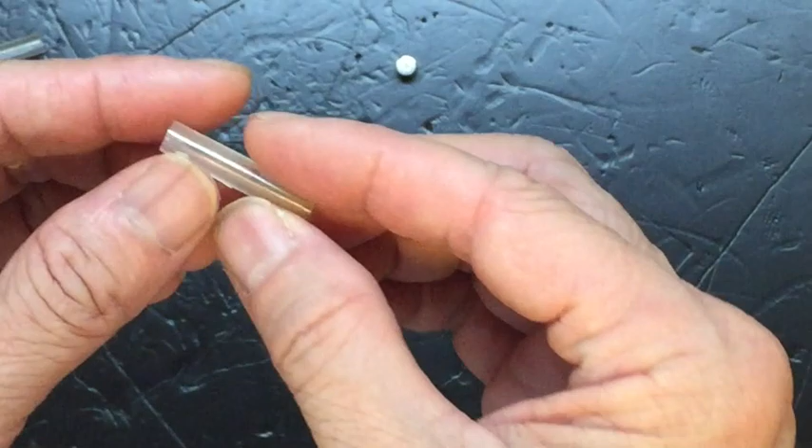So what we do is we can put any diode inside, bend the legs, put in the cap easily without squeezing too hard, like this. So this way you have a fuse tube 3D printed, and you can use it to mount onto the crystal radio. For example, this is the crystal radio that I created recently with 3D printer parts.

I put in a common fuse holder that you can buy from the component shop.

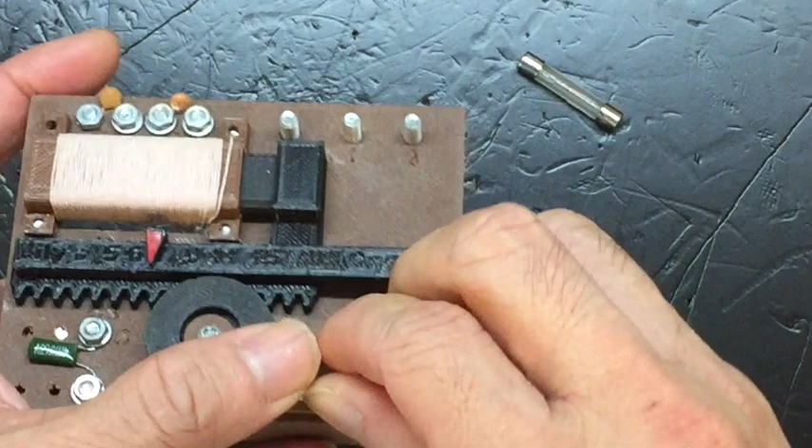So if it's the first time you use Fusion 360, you can download it from the official site, then get a personal license or an educational license, and you can use it free of charge. Something about Fusion 360 is all the files that you create will be on their website, on the cloud, so it will be very easy for you to share your file with others.

On the other hand, you can also use this export command to export your file to .f3d, so you can store it locally as a backup in case the cloud system is not available. Then the next time you run Fusion 360, you can import or open this file to get back your design.

So let's start a new design. Click on the File menu, New Design. And then you have unsaved here, right? So let's put in a name. We can save it. Put in a name of fuse tube, something like that.

And then the file name will change to fuse tube, and it will have a version number. Version 1 is the first time you save. If you save it a second time, it will become version 2. And then you can always go back and reopen the previous version.

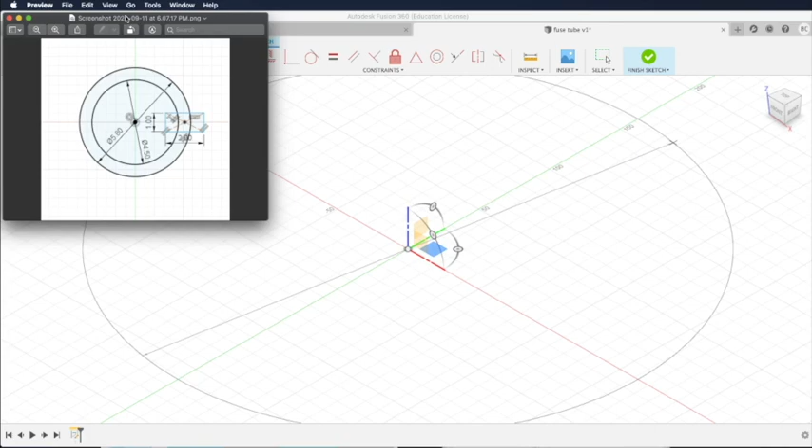So this is a screen capture of my previous measurement. So the size of the fuse tube, the outer wall is 5.8 millimeter, the inner wall is 4.5 millimeter, and the thickness of the wall is 2 millimeter. So we'll repeat that and draw it here. Okay, so let's first draw the 5.8 millimeter. Go back and draw the circle again. Click the XY plane again. Draw the circle. So we input 5.8 millimeter.

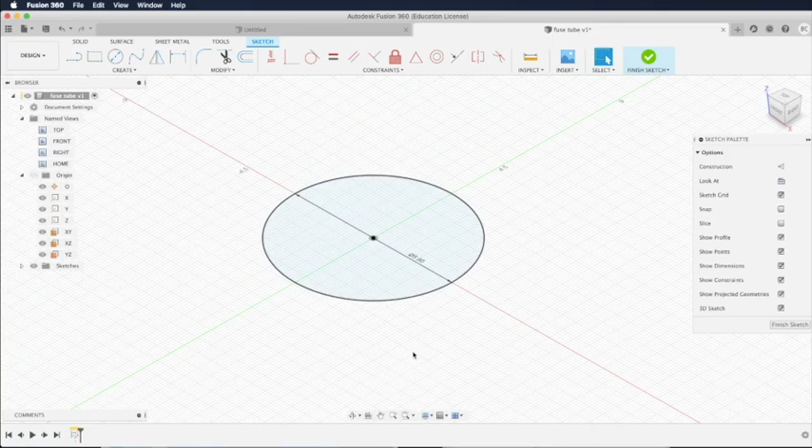Well, if it's too small, you can scroll the middle scrolling wheel of your mouse and make it bigger. And if it's all the way to the left side, you can click this pan button, the hand icon, and drag it back to the center. And then press escape to get rid of the hand. Okay, now you see we have a dimension 5.8 millimeter, which is the diameter of the circle.

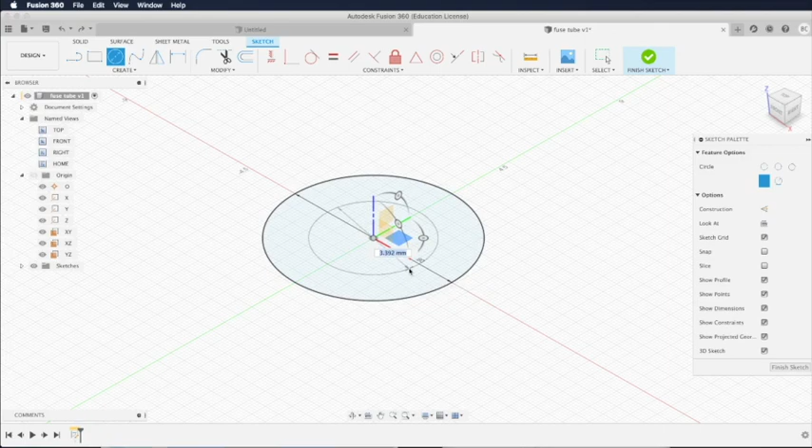Now we need to draw a second circle within this one. So let's highlight the circle, click the command C again. Let's draw a second circle. Diameter will be 4.5. Okay, if you think these two dimension lines are too close together, you can click on that arrow and drag it elsewhere, so you can see it much easier later on.

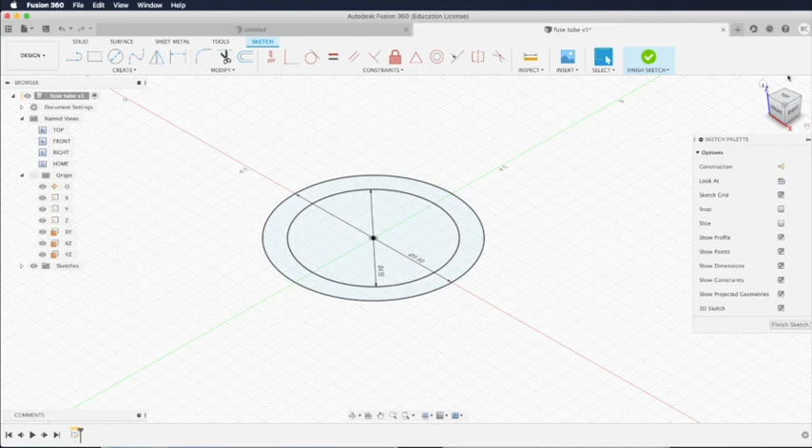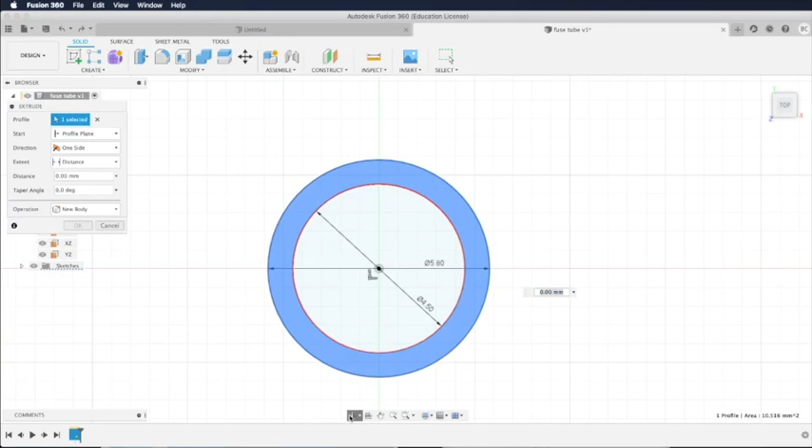If you don't like the view you are seeing, you can click this cube at the top right hand corner, click on the top, and it will show the top. You can also rotate the wheel. So this is what you see from the top of the printer. And what we want to do is, okay, so we can click on the ring and make it an object. And let's click this orbit view changer, so we can change it to a more three-dimensional view.

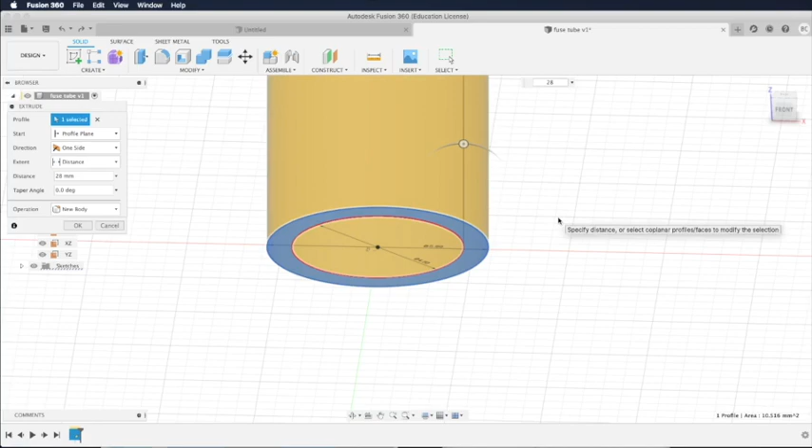Now you see we can raise it to a cylinder, and how much we raise, we can input it. So we have 28 millimeter. Okay, so this becomes a real cylinder now. Next, we will need to drill some small slits so we can fit through our diode legs. We do that by creating a small rectangle. Press the S shortcut key to bring up the sketch menu, and then we'll draw a rectangle on this surface.

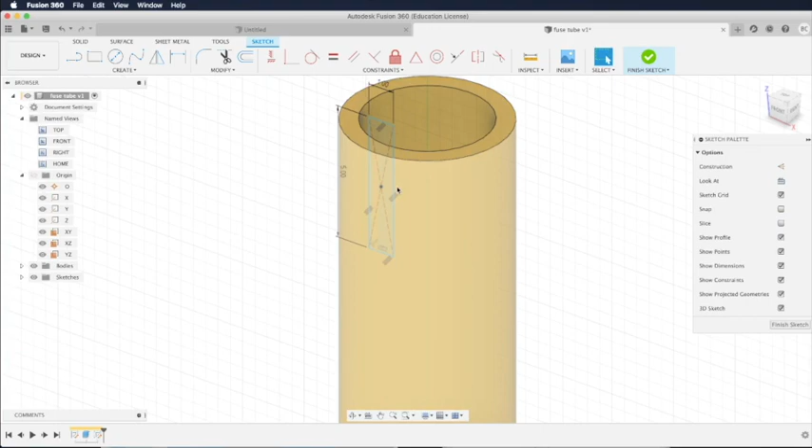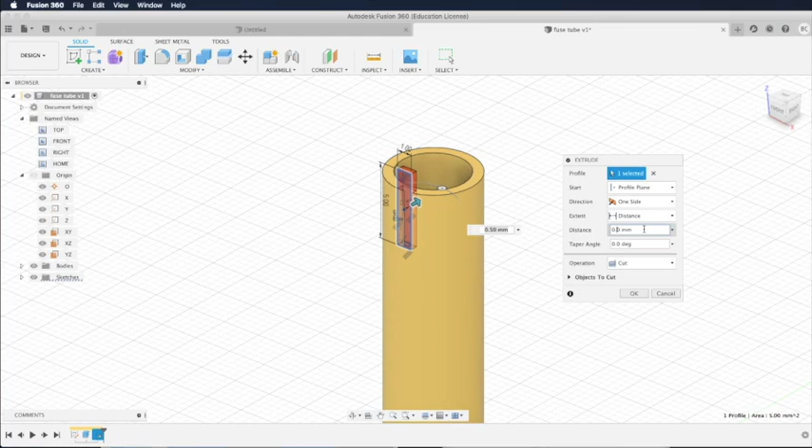So let's put in 5. And the size of that is around 1 millimeter. Okay, let's hit enter. So this slit has been created. Okay, and we need to press this slit into the wall. We select the shape of the rectangle first, like this, and then right click. Again, use the press pull command. This time we push it inside, and we change our function to cut, 0.5 only, not too deep. Okay, let's click OK. So you see a slit has been created.

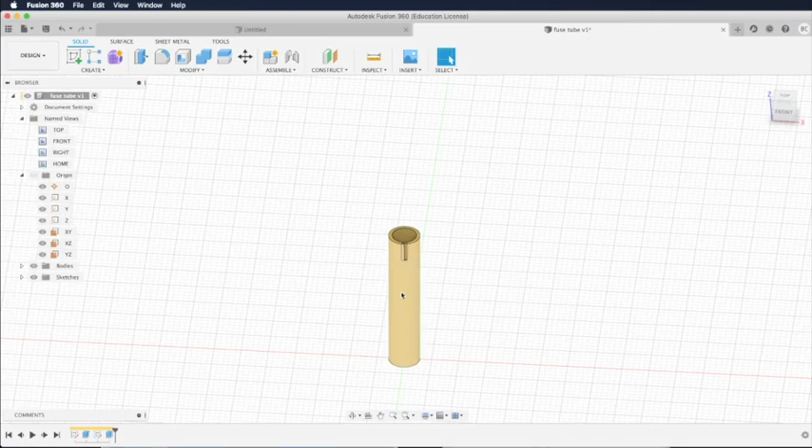We want to copy this over. We want to copy the slits at the top to the bottom to maintain symmetry. How do we do that? So there's a function called mirror. But before we do that, we need to create a plane so we can mirror on. So how do we create a plane? There's a construction menu, construct, and then you can select mid-plane. Click that. So it will ask you to select the 2 planes, bottom and top. Then it will create a middle plane in between.

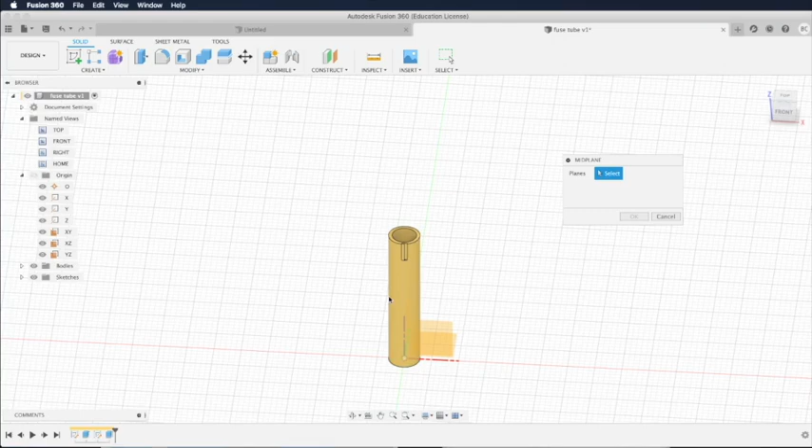So let's select the top plane first. Okay, and then we need to select the bottom plane like this. So once you selected that, you'll see a middle plane has been created and we'll be mirroring on this middle plane. Okay, let's click OK.

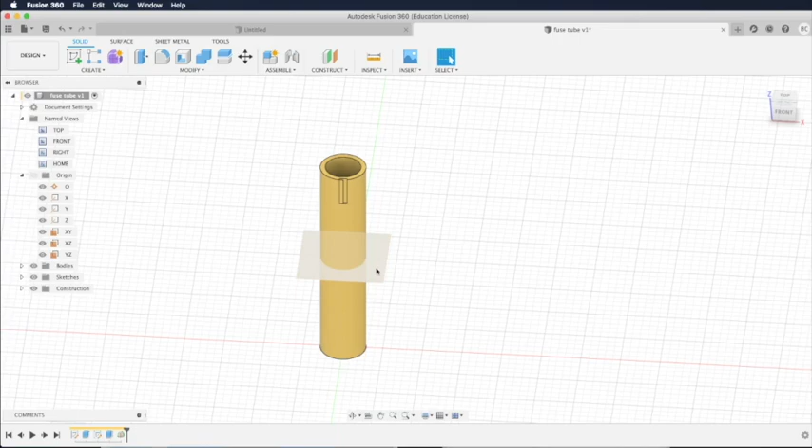So this is our middle plane. We just cut the fuse tube in half, upper and lower. And then we need to bring up the sketch menu, press the S key, type in mirror. Okay, this is mirror. If you want to use it more times, not just once, then you can click this arrow button to add it onto your menu, so you can click on it quickly. You don't need to type mirror next time.

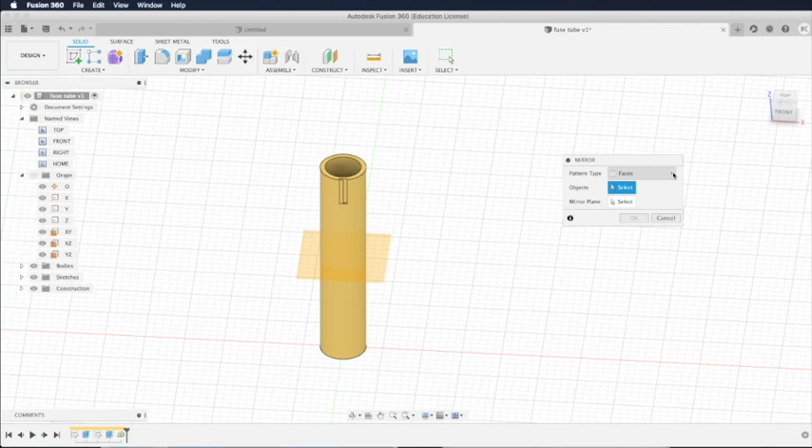So now that I've created it, let me try the S key again. I can see that there's a mirror icon here. I can just click it. So now we need to select what type of things we want to mirror. We can mirror the sketch, which is the face, or we can mirror the whole body, which is the solid, or we can mirror the feature. A feature means an indentation within the face, or a hole. It's just some solid shape that you want to copy, but not the entire solid body.

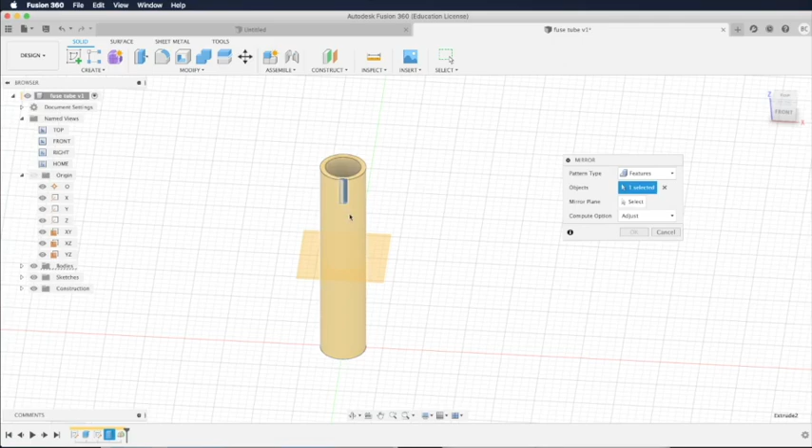So let's copy the feature. And then we need to select the feature. So let me select this part. Okay, you see that it's now highlighted in blue. That means it's being selected. And then we select the mirror plane. So that means we select the middle plane to mirror on. Once we select that, the same feature is replicated at the bottom because it's mirrored by the mirror plane. So let's click OK.

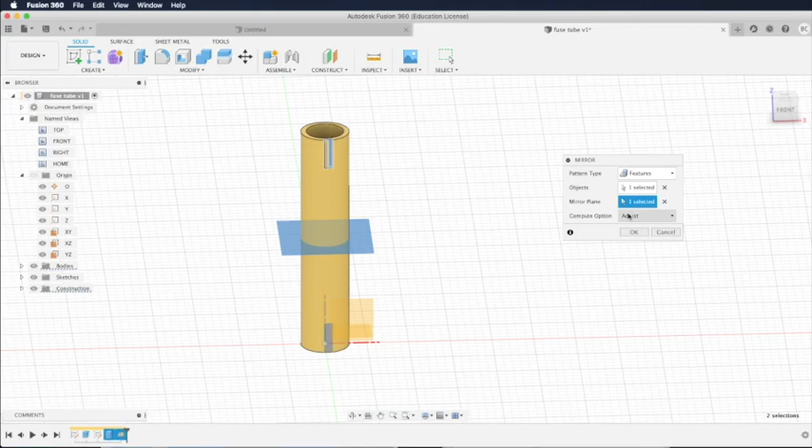And now we can come and see it. So the bottom also has a slit. The top there's a slit. And then we are done. So we can get rid of this mid plane if we don't want it by clicking this eye icon here. Okay, so those construction planes will not be printed. It's just there to help you design your features, make it easier to use the tools within Fusion 360, like the mirroring tools.

The other thing you need to do after you finish the major design is to finish the edges, because sometimes the edges are very sharp. If you print it out this way, the edges will likely fall off after use. Just click on that edge, and then click on this fillet button. The fillet button will round up your edges, so it will look more professional and be easier to deal with. Let's click on it.

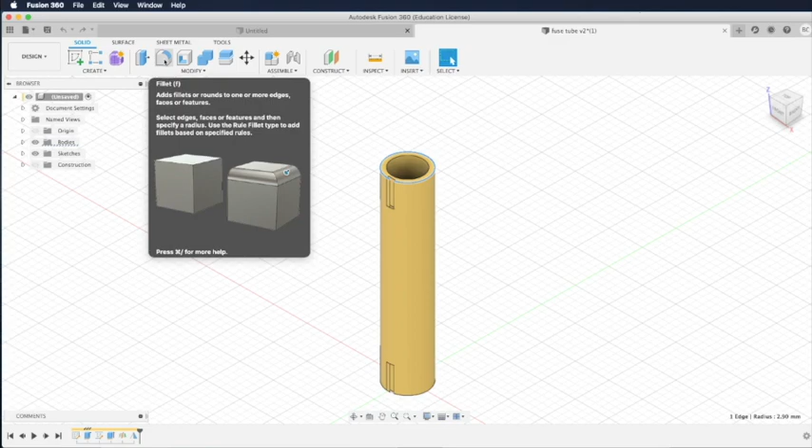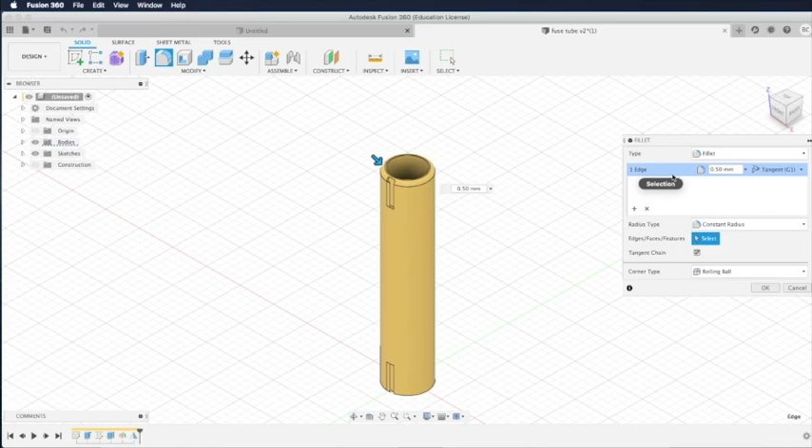And we'll need to give a size of the radius of the fillet, like 1 millimeter radius. It's like drawing a circle of 1 millimeter across this edge to make it smoother. Or you can try 0.5, see what happens. Right, 0.5 is like this. So it depends on what you need. I think 0.5 is good enough. Okay, and then you can click OK.

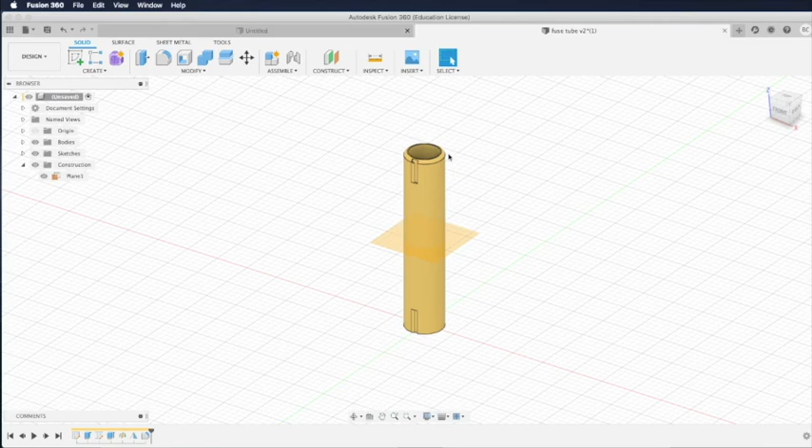Okay, how do we replicate this fillet down to the bottom? So we can go back to our browser and turn back on that middle plane here, so we can do the mirror. So let's highlight this surface where the fillet is created. And then we press the S key to bring up the sketch menu. Click on mirror. So we already selected this face, and then we can select the mirror plane, which is this one.

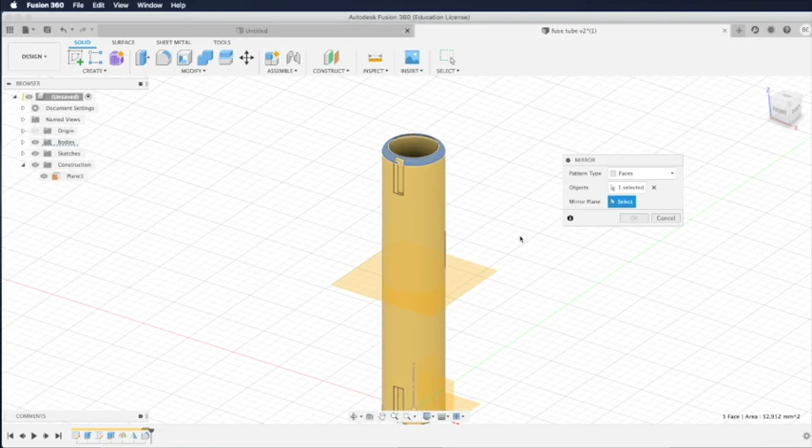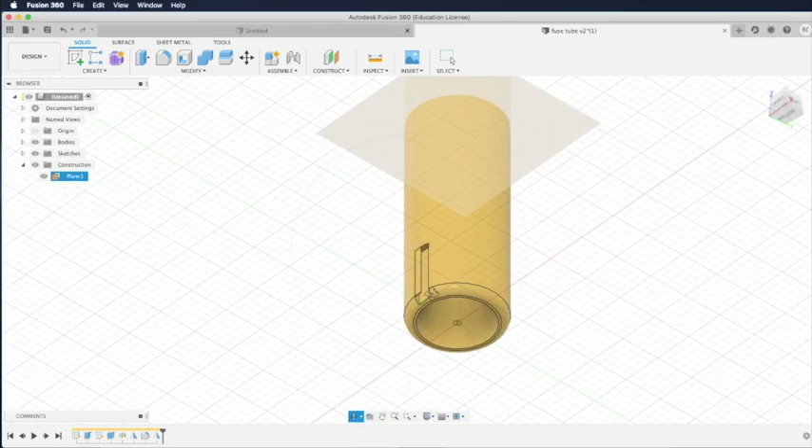Okay. Let's take a peek. So this one is already being mirrored. The fillet is mirrored down to the bottom. Okay. Let's click OK. Let's see the results closely. Okay, you see that this is already mirrored. The fillet has been filled in to the bottom as well. So let's remove the plane and get back our design. So this is it. That's our finished design with the fillet added.

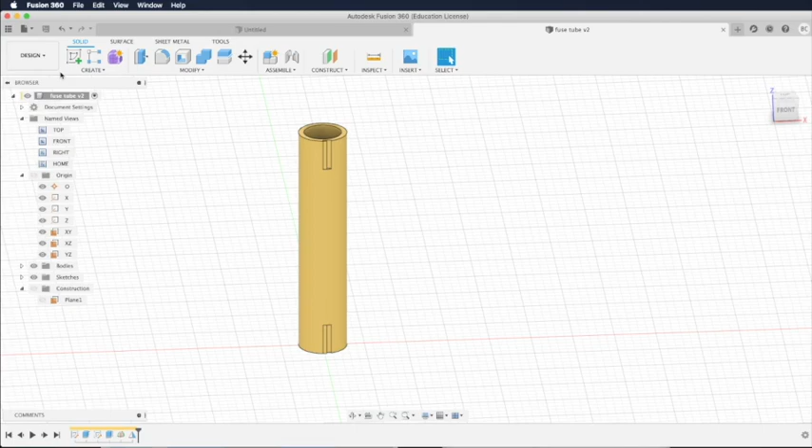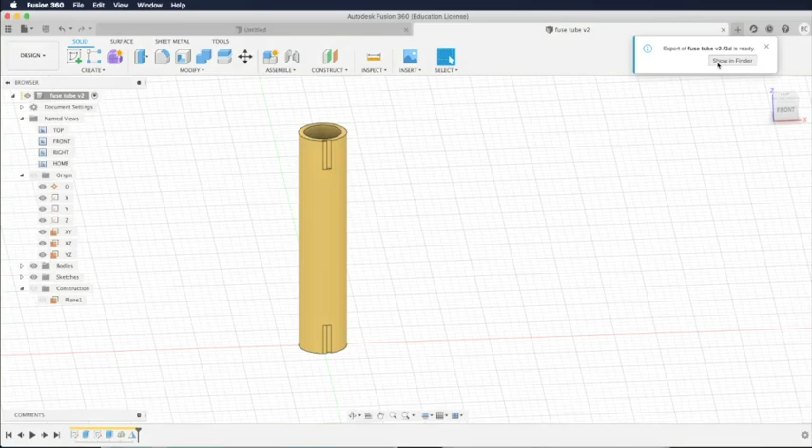Let's save it. Click on File, Save, and you see that the version now jumped to version 2. The next thing we need to do is to print it, and you may want to save it as your backup file first. So let's click on this File menu and Export. By default it's using the .f3d, the archive file for Autodesk Fusion 360. The file name is there, and then you can click Export. So it is completed. Let's show it in the folder. Okay, it's being saved here.

Okay, so assuming that you accidentally lost your file and the cloud is not accessible, what do you do? Then you can click File, Open, and then you come here to Open from my computer. Find this archive file that you saved just now and click Open. Then you get back your design from this archive. And then you can save it with a new name to the cloud again. But we're not going to do that.

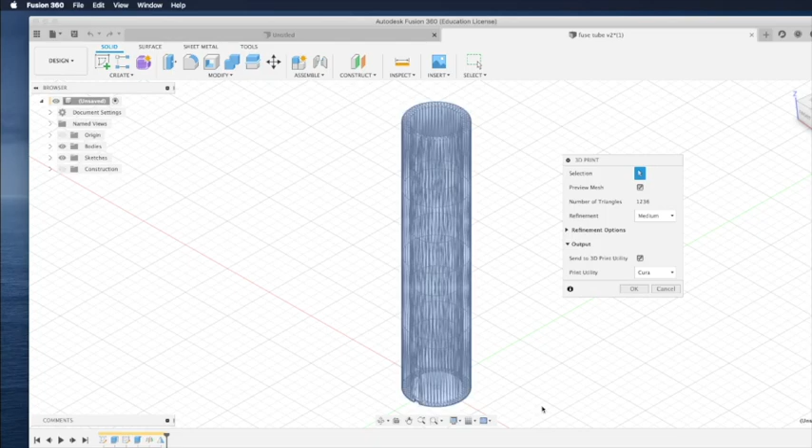So now we are going to print it. To print it, we click File, 3D Print. If we want to print everything, we just click on the named view, so we will print all the models, all the components, all the parts in this design file. But now we only have one part, so it's being highlighted in this mesh wire diagram. It simulates all the threads being printed line by line.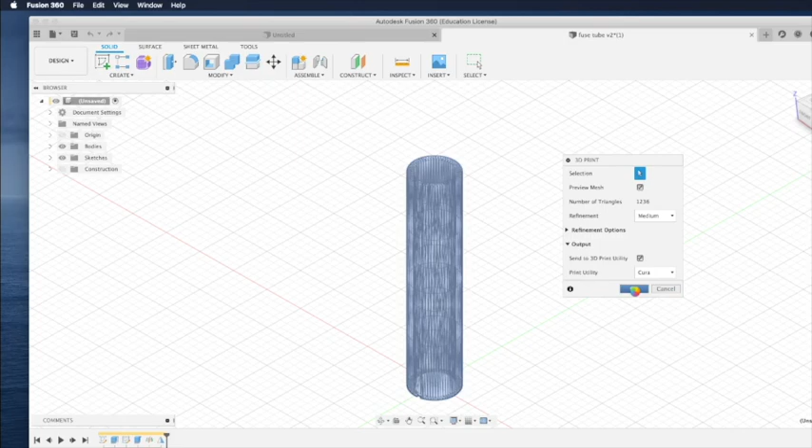And then we can select our print utility. I'm using Cura, so we just select that and click OK. It will then launch your print utility, so it will launch Cura in my case.

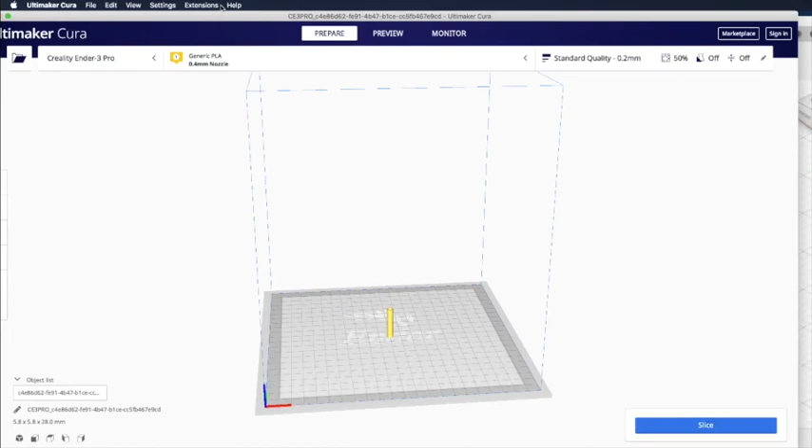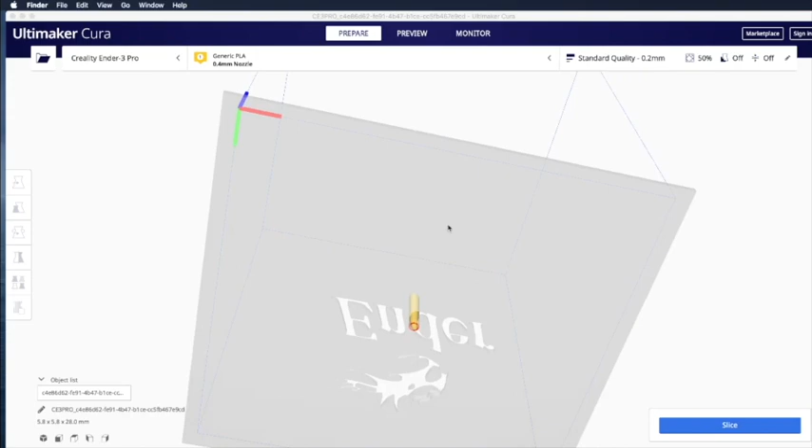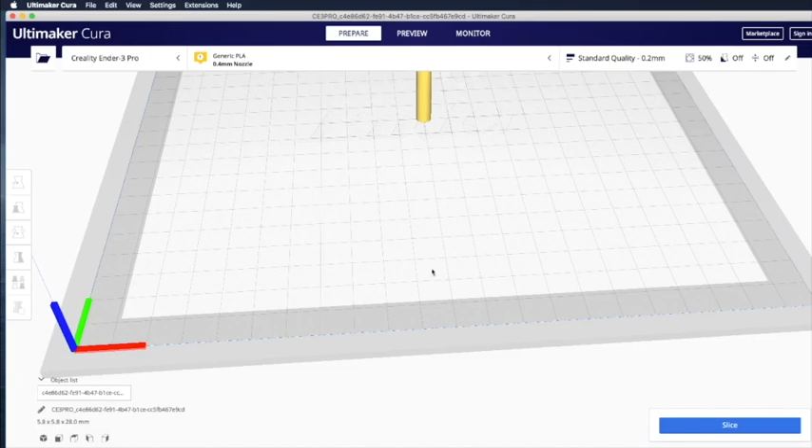Okay, once you've got Cura launched, you'll get this menu. And then you can use the mouse wheel in the middle to enlarge it or shrink it. You can use the right mouse button to drag and change the view to see through the model. Look at the bottom where the holes are drilled, whether there's holes. And you can click on the middle wheel, hold it, and then change the position. Yeah, you can change the position up, down, left, right, so you can see it more clearly.

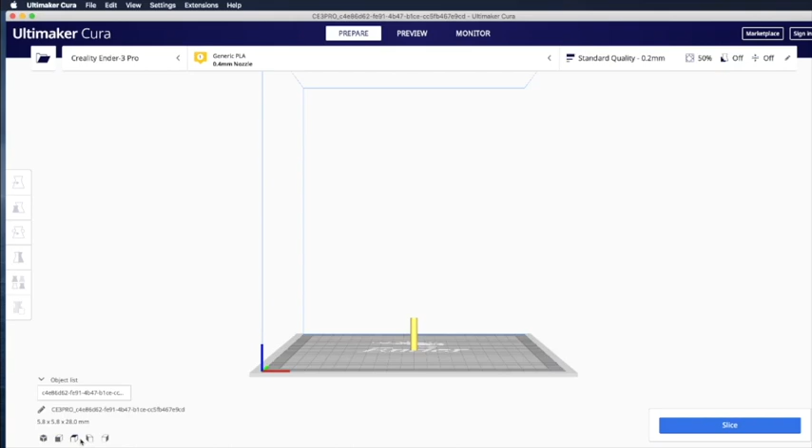Okay, once you are done with it, you can move it back. You can also use this icon to show you the default views. Okay, let's go back to this one. Let's see it from the top. And then we can do the slice. Slice means converting the design file into the G-code format, which are instructions to tell the 3D printer how to print. So we can click.

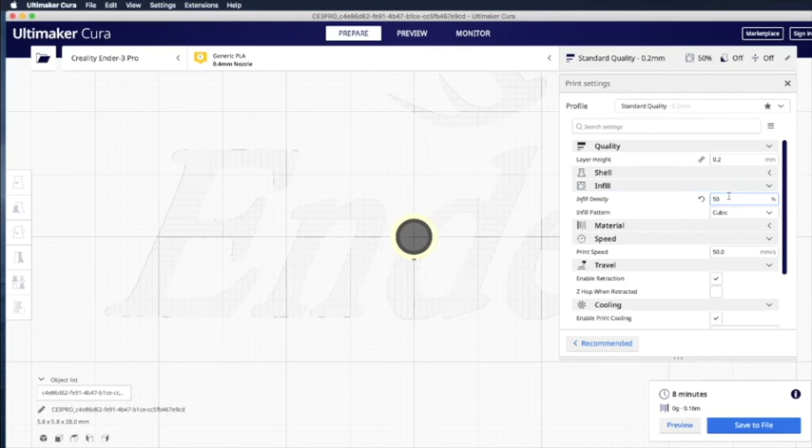Before we do that, we forgot something. We need to edit the setting here. Click on this button to edit the setting. So what we want to edit is the infill density. That means how dense we want the material to be. It's occupying 50% of the solid space. This will allow us to have a more solid print. The default value is only 20%, which is not firm enough.

Okay, and then the other thing we need to change is the support. Generate support material. That means if you have something overhanging and it's hard to keep it in mid-air without a support, then Cura will generate a pole or a column to support it. And then after printing, because the column is printed loosely, you can easily get rid of it using a knife or scissors. That's what support means.

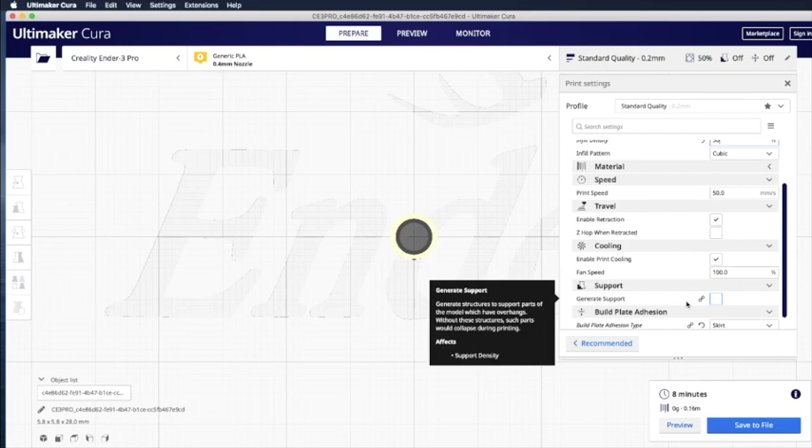But in our design, we don't need support because it's all supported by itself. The lower layer supports the upper layer, and we don't need another support. We don't have any overhanging. We don't have an arm of a tree hanging out, so we don't need support. So once we finish that, we click close to close it, and then we can go to preview.

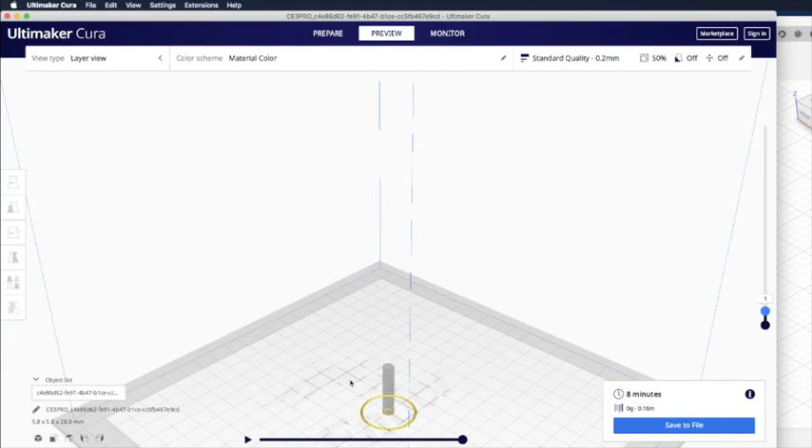So the preview will simulate how many layers are being printed. You can see here 140, that means 140 layers are being printed here. You can drag this vertical bar, slide back to layer 1. Then you can see. Let's look at it this way. So you can see layer 1 is being printed here. This is layer 1. And then if you scroll up, more layers are being printed up to layer 140. That means the entire tube is being printed.

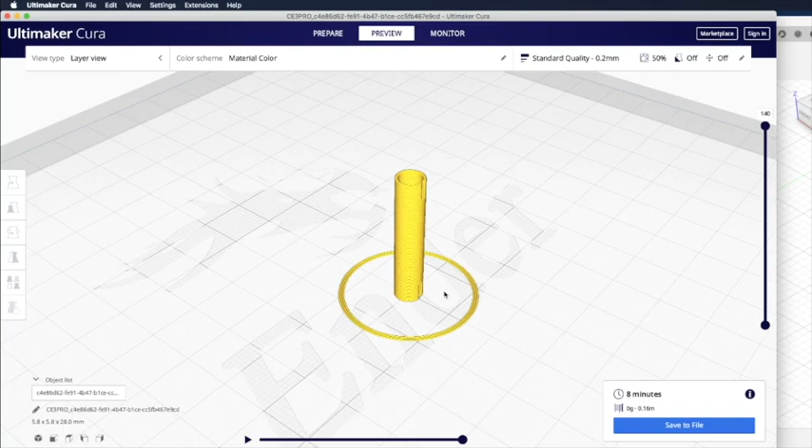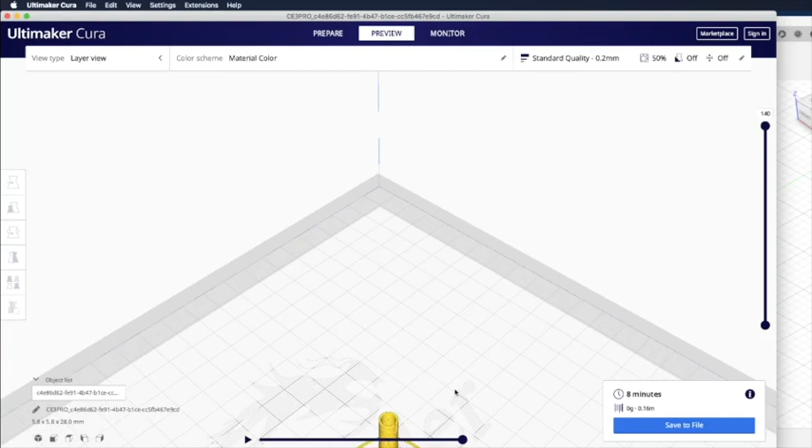And you can check the side to see if it's alright, is the slit being printed properly. Right, this is the slit. Is it printed properly or not. Yeah. And then when you are fine with it, you can save to file. Or if you have inserted your 3D printer's SD card, you will see a save to removable drive here.

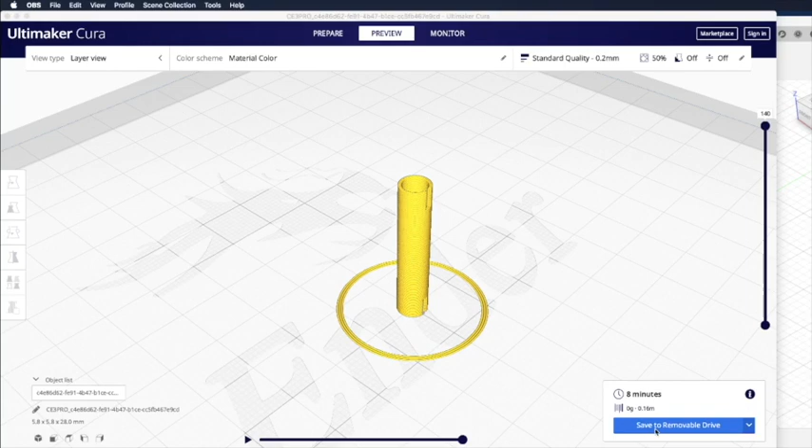Let me insert my 3D printer card now. Okay, once I insert it, you should see that this icon changed. And it will change to save to removable drive. So let's click, and then a file will be saved. So remember the name of this file. If you've got multiple files in your removable drive, it's hard to find it because this number is random.

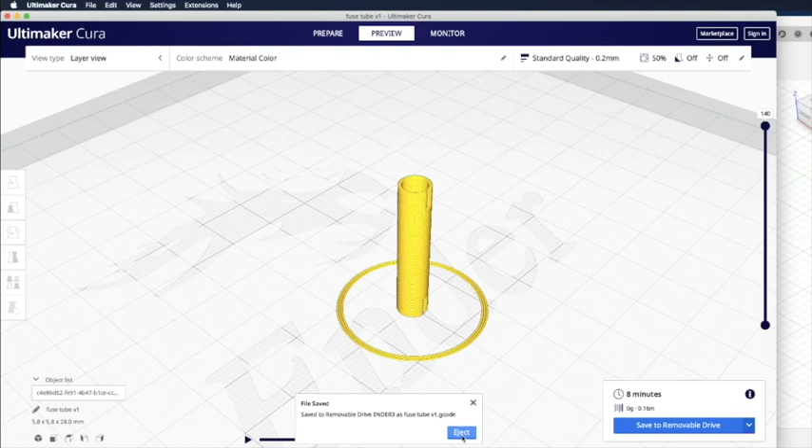So what to do? You can edit the file name here, make it more meaningful, like fuse tube version 1, something like that, and then click enter. And then when you save it again, the file name will be saved as fuse tube version 1.gcode, so it will be easier to find when you choose it from the printer to print. Okay, let's eject and let's print it.

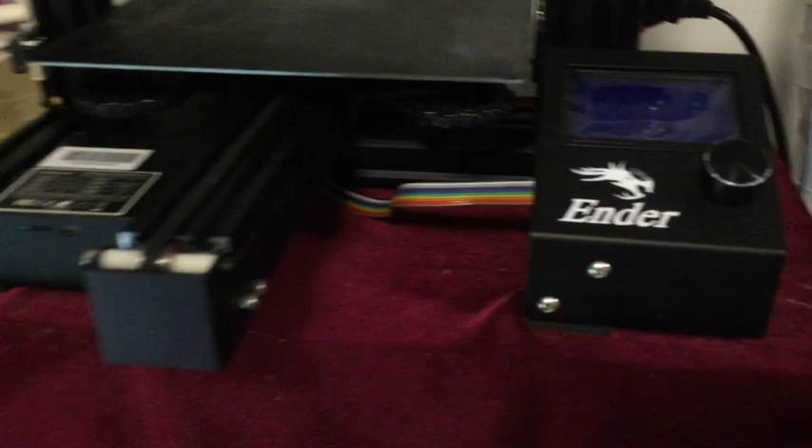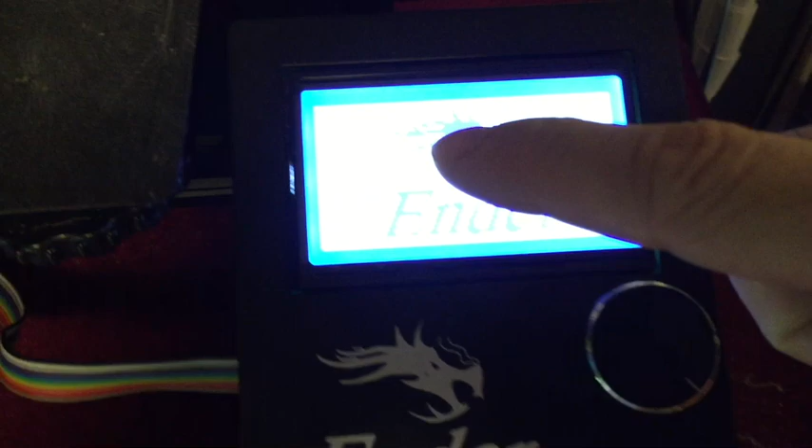So this is my 3D printer, the Ender 3 Pro. I've set it up myself and it's been helping me to print the parts. It's been very easy to use. Let me switch it on. But it's a bit noisy.

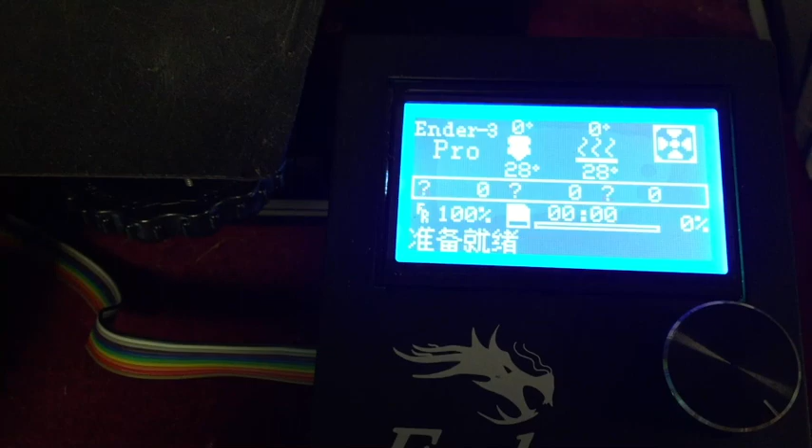So let me take out my removable drive, and I insert it usually face down into the Ender 3 Pro.

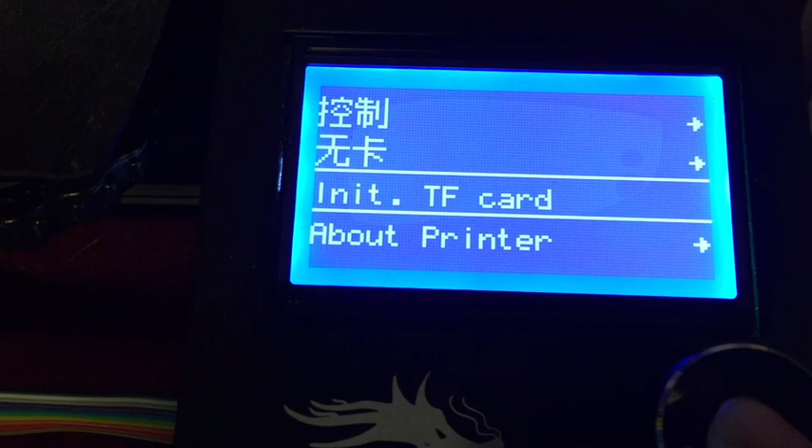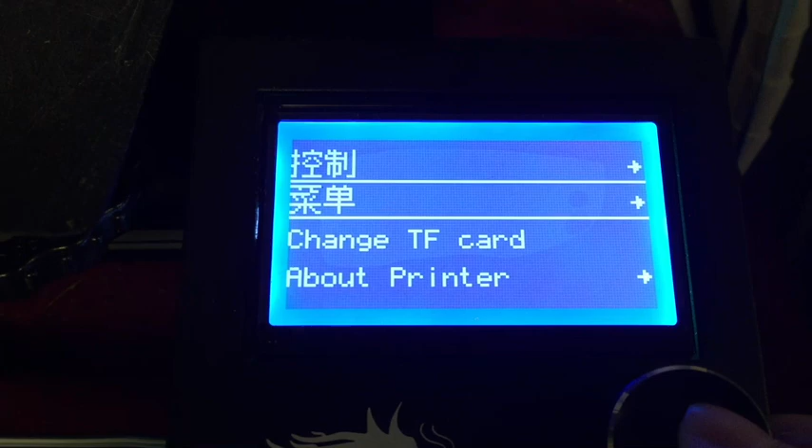Okay, inserted, and then I need to change the card. So that's the init TF card. It doesn't mean we erase the TF card. It just says read the card again. And then once you do that, you have the menu. It's in Chinese. It means menu. And then once you're in the menu, you'll find the file that you saved. So we saved it using the file name of fuse tube.

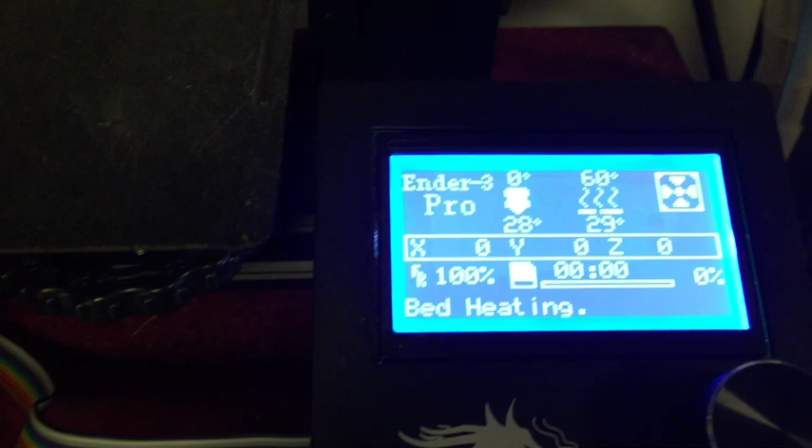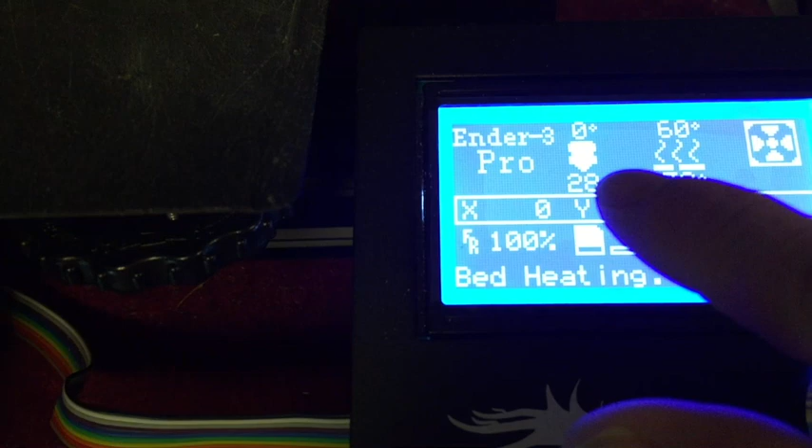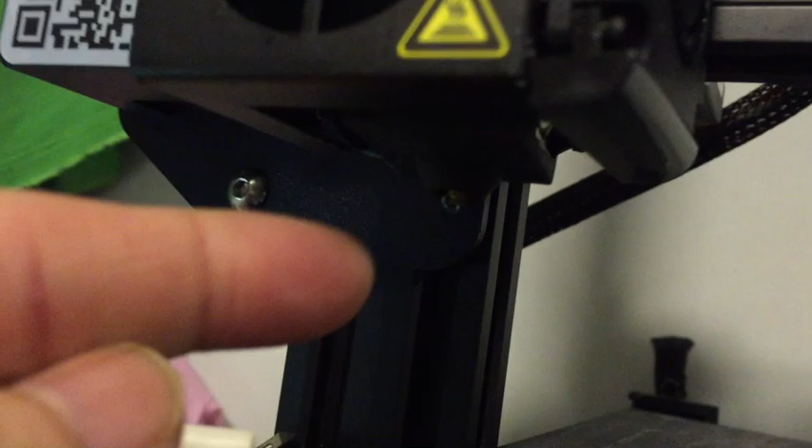Then let's click it. And then you start heating up the printer. So you will first heat up the print bed to 60 degrees Celsius. After that, it will heat up the printer head, which they call the extruder. The printer head is this one. The extruder. The printer head is actually underneath here. So we'll continue to watch it until it's finished heating.

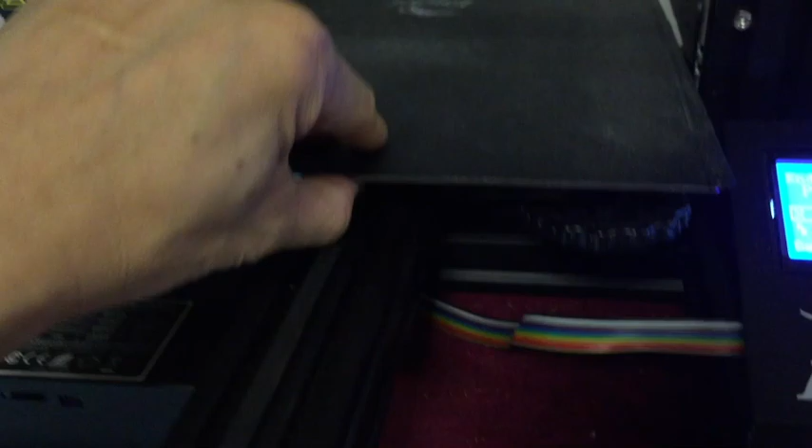The 3D printer has a movable print bed, and the print bed is usually made of steel. So you can get a magnetic blanket and put it on top, and then you can print on this blanket. In the old days, 3D printers were more primitive. You needed to stick some heat-resistant tape on top every time you print, and then slice it off every time you finish printing. It's a lot of trouble.

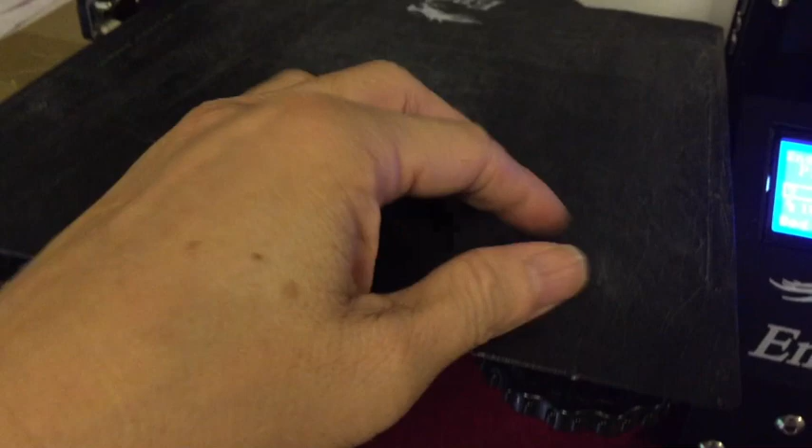Now they have this type of reusable blanket that you can just put on and use for months without problem. The only time you need to change it is when you find some ditches or some uneven material stuck in here that you can't remove, then you need to change it.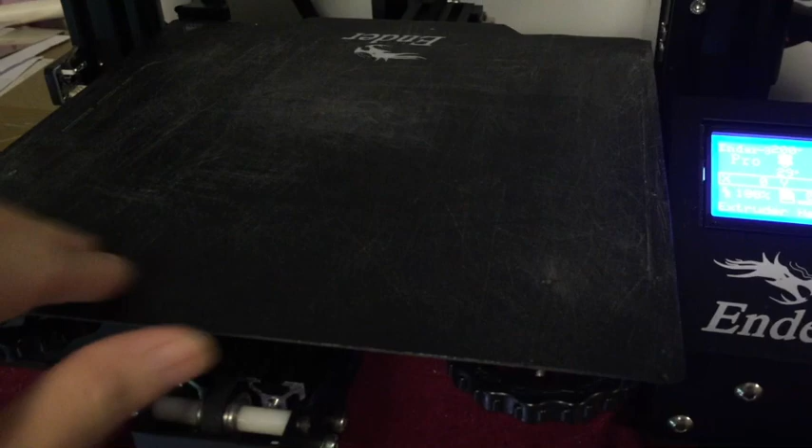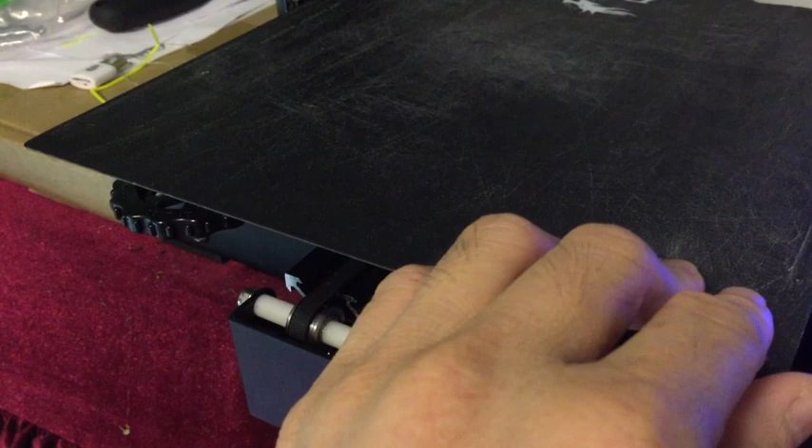There's also a newer type of print bed. It's made of glass and silicon, and you can use that as well. That one makes it very easy to get your printed object off the print bed, because once it cools down, the structure of that print bed will change and force the printed object to just release itself. So it's very easy.

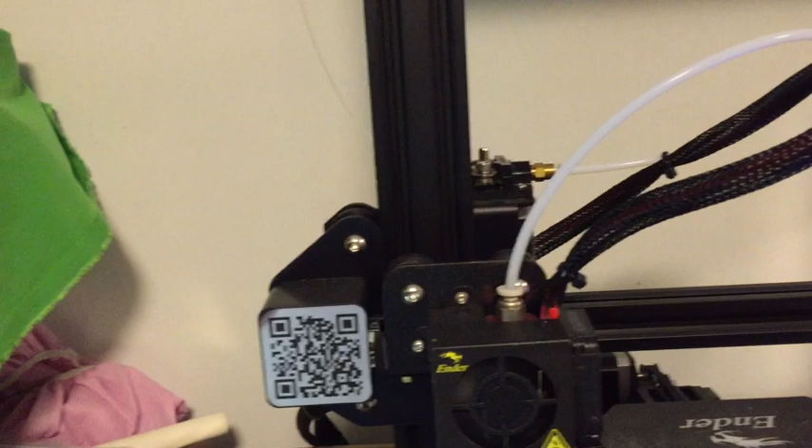And the only maintenance you need on your 3D printer is, number one, mount this type of filament, PLA, I'm using. You have a different choice of printer materials. PLA is the easiest to print. Otherwise you have ABS, which is harder, but harder to print as well. And then TPU, which is flexible. It's like those you can use on a face mask. It's like rubber more than plastic.

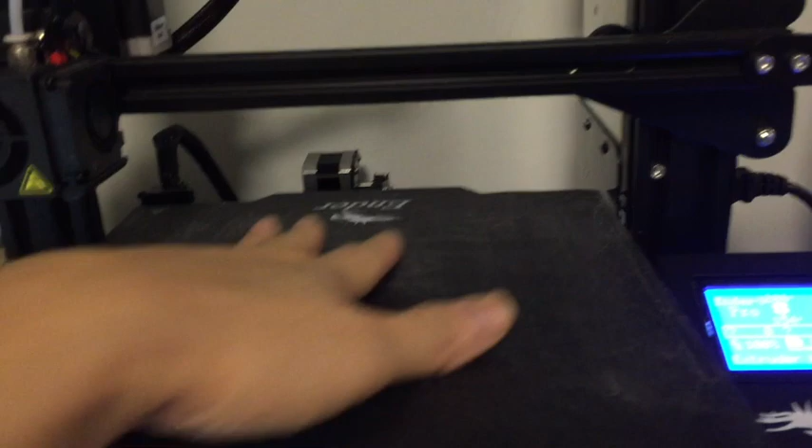The other thing you need to do for maintenance is to maintain this print bed. Sometimes you've got material stuck, and then you need to use this to get rid of it. And sometimes if you try too hard, it still sticks there, and you need to replace the whole blanket. The first thing you need to do is to level the print bed. There are some videos about how you level the print bed. That means make sure the first layer can be printed nicely. Otherwise, the second and third layers will not be able to continue to build up.

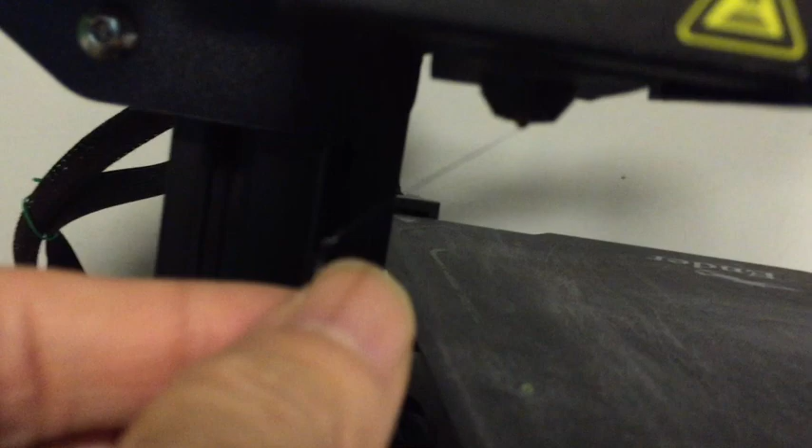You see the extruder is being heated and some PLA filament material is just coming out of the print head. So let's see here. Extruder is 199 degrees Celsius, almost 200, the standard required temperature. So you see the extruder is still being heated. Now heating is done because it's over 200 now. And then we see the print head and the print bed are moving into position to start printing.

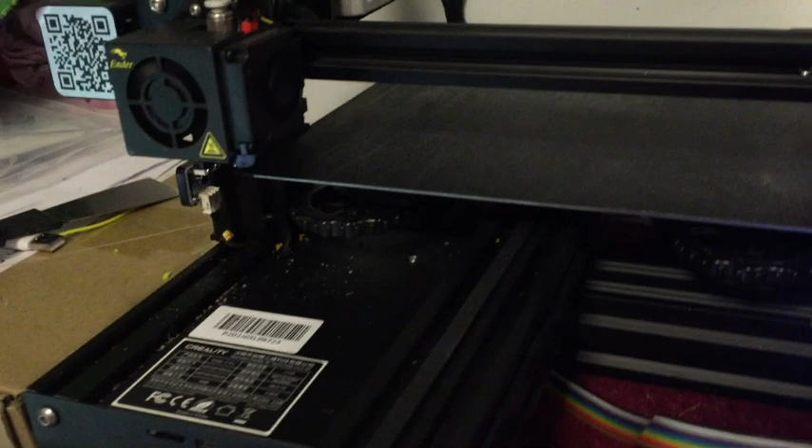So first it will print a straight line at the left side of the print bed, just to get rid of the previous residue print material, and then it will start to print a circle to circle everything that will be printed. It does that to make sure there's no blockage before printing the component within that circle. So after that first layer of circle is printed, we will start printing the object we are interested in.

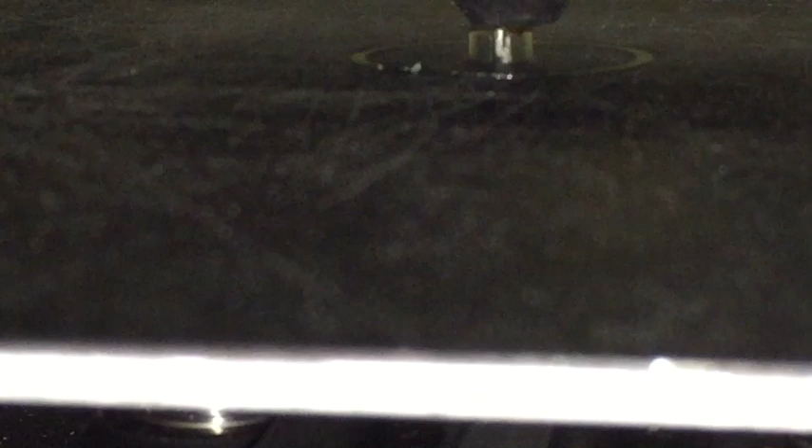So let's see, it's printing the first tube now, layer 1, very slowly. It's already printed 3 or 4 layers now. Initially, you can see it's printing up the third and fourth layer very quickly.

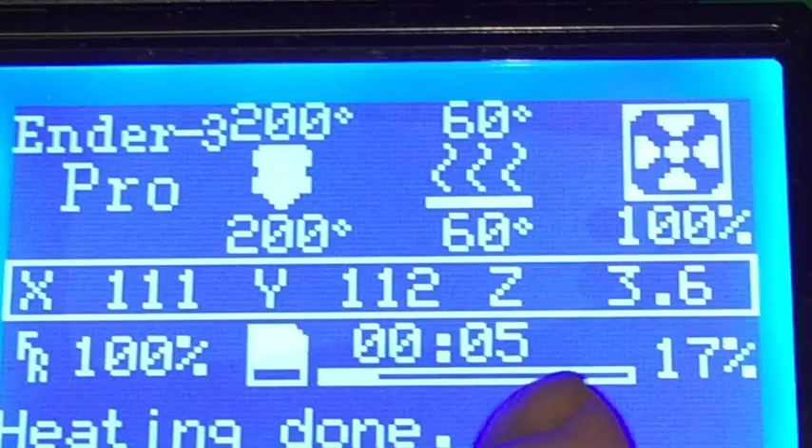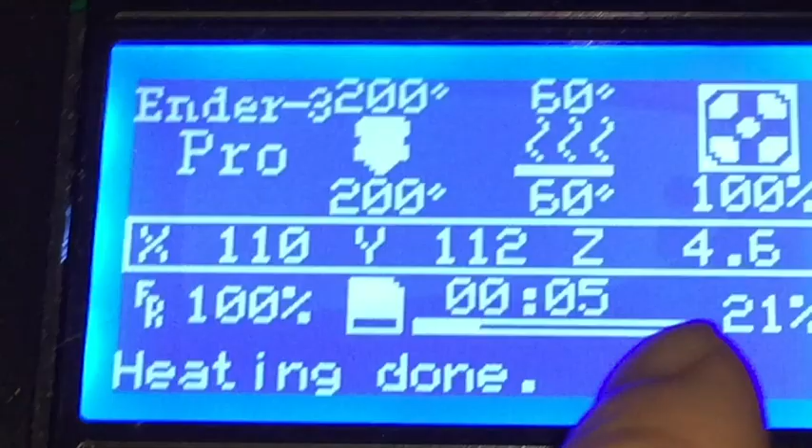Now let's look at the print time. You can tell the print time here is, we already printed for 5 seconds, and that represents around 17%, 18% of the total print time. So you can kind of estimate what will be the total print time. So now we are at 20% and we used just 5 seconds, right? So if we multiply that by 5 to give 100%, that means we need around 25 seconds to finish the print. And let's see whether that is true. Zoom back into this print head.

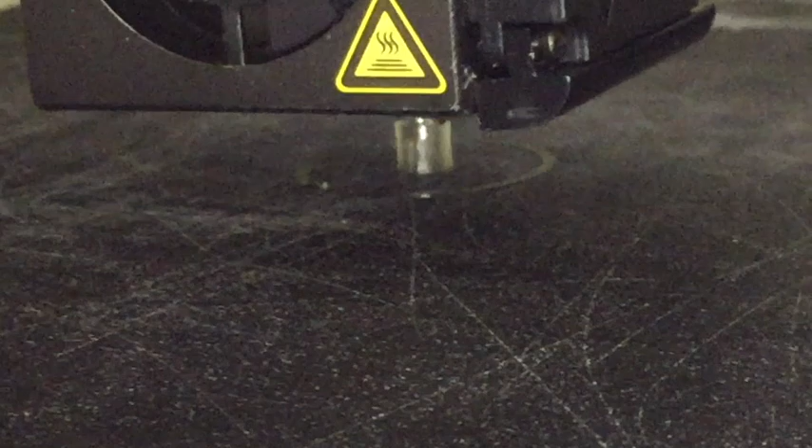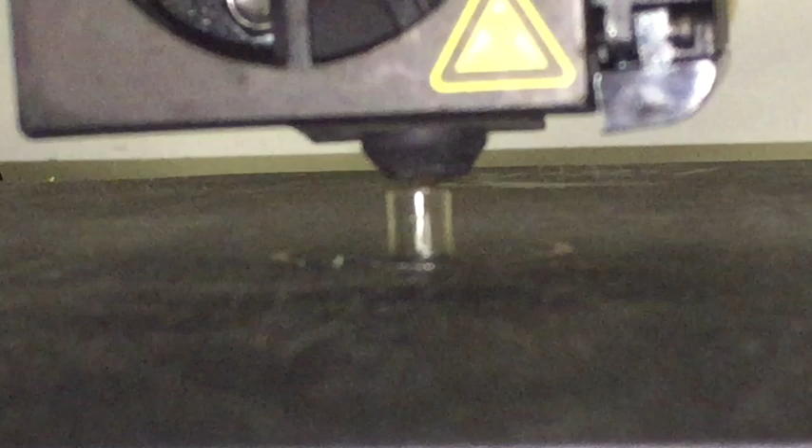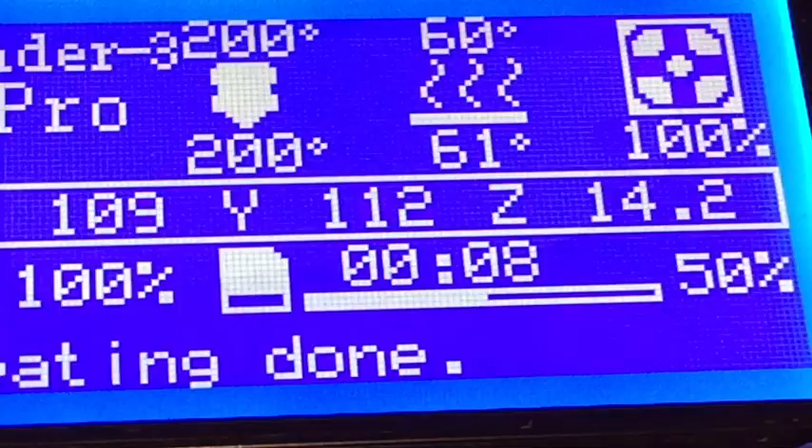So I think now we are at the middle of the printing progress. Let's see. 8 seconds, 50% done. That means we should expect 8 more seconds until this is done.

Okay, we finished printing. We'll just take it off like that. And the slip is printed nicely. The bottom as well. I think this looks good.